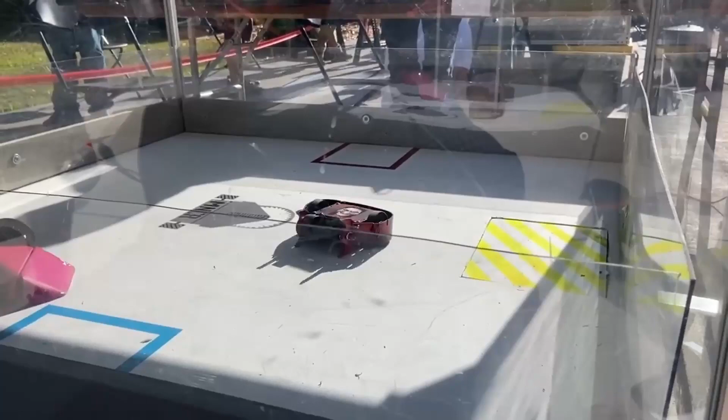I've built several combat robots at this point. 2 versions of Stompbot, 2 versions of Blastwave, and Thwackintosh. However, they are all quite small, capping out at 1 pound. So for my next robot, I decided to go big, but not too big, and push towards the featherweight class of combat robots. I'm Kepler Electronics, and meet the newest addition to the fleet, Dreamphaze.

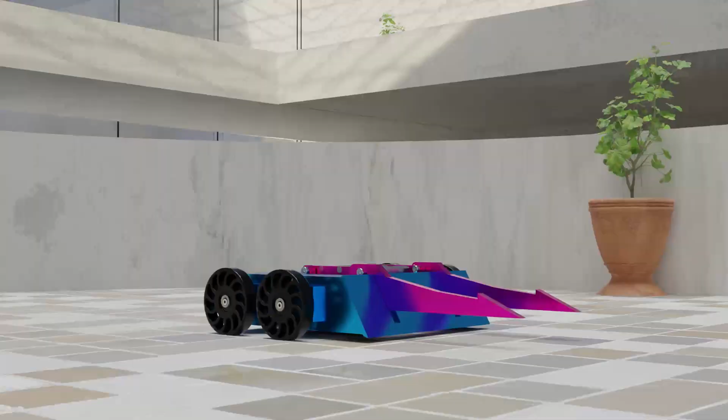Dreamphaze is designed to be a competitor for the Sportsman class, which disallows certain designs as a competitive challenge. Active weapons are required, so a purely defensive design like Stompbot would not be allowed. Kinetic spinners are also disallowed, so something like Blastwave would also be against the rules.

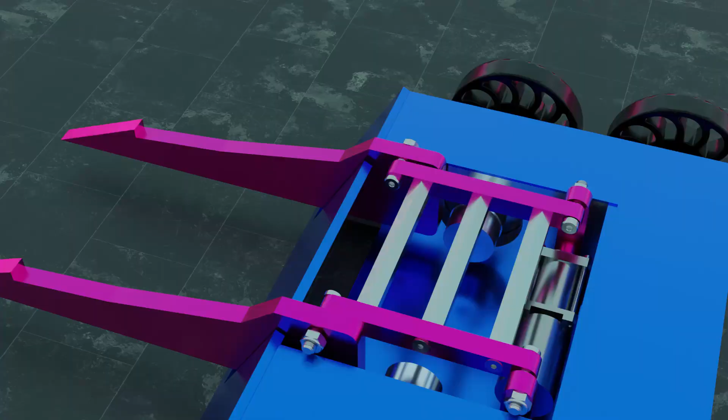The reason I decided to go with the Sportsman class was because I wanted to build the robot out of relatively inexpensive parts and not have to worry that it would get completely destroyed in its first match. So I went with a lifter design comprised mostly of affordable aluminum plates.

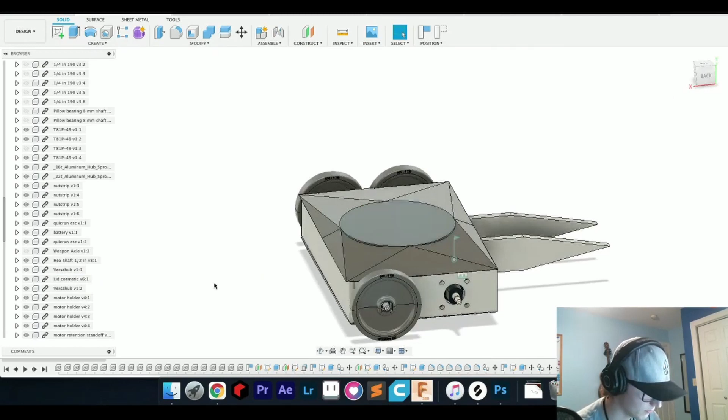I actually have 2 CAD designs for the robot, the initial ill-conceived design that I would eventually scrap, and the modern design I made mostly on stream. I designed this mostly during my economics and music theory classes my senior year of high school. It looks pretty decent at first glance, but has quite the horrible pivot mechanism for the lifter.

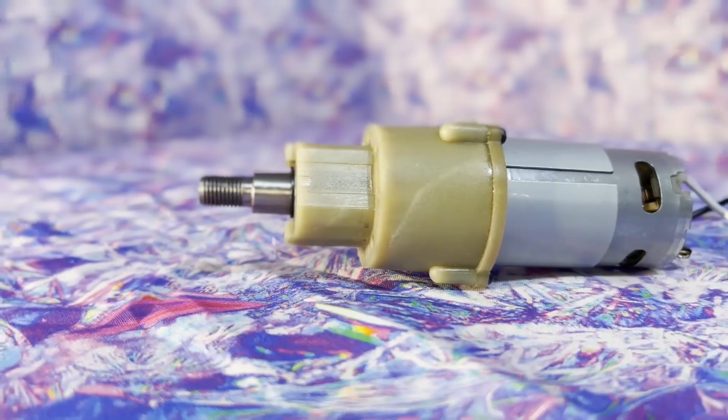Since I have streamed most of the CAD design, this video is going to be an abridged version of the process of designing Dreamphaze, just to give an idea of how I went about designing something of this scale. So let's start with the things that were pulled over from the first iteration, the motors. The drive motors in both designs are just cheapo drill motors.

I already bought a lot of these like 2 years ago, so they've been sitting in my closet for the longest time. These are considered perfectly acceptable featherweight motors, albeit disposable, and I will be using 4 of them. For the lifter motor, I designed it around a P61 gearbox with a 550 motor mounted to it.

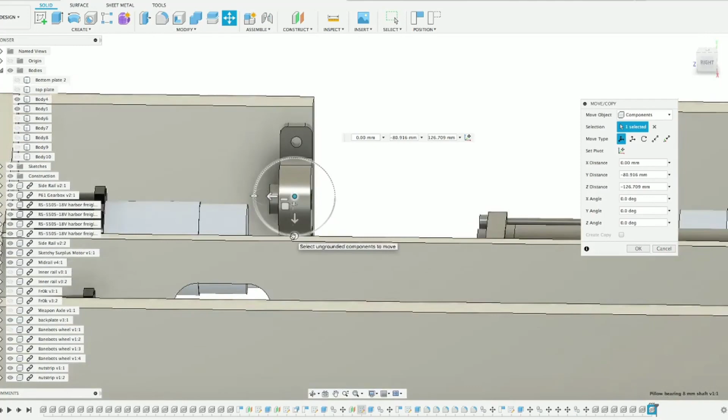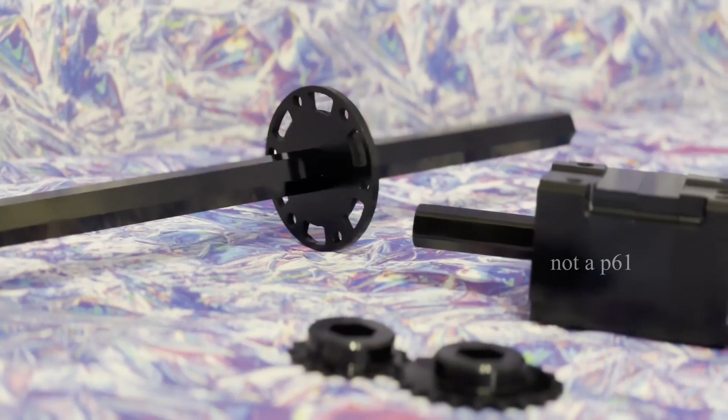So, when I decided to start streaming my CAD design sessions, the bot looked like this. A couple plates of aluminum, motors, and the forks in front. In the first stream session, I immediately went on to try and design some nut strip to allow for easier assembly, and added in some wheels from Banebots. I did move this plate from the bottom to a more central location, cutting in a hole for wire routing.

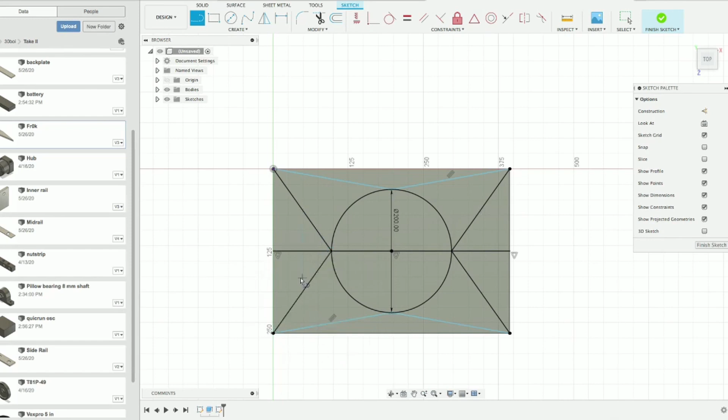I also prototyped some lids and continued onward, making some front panels before going off on an absolutely ugly cosmetic cover attempt. The fork bearing blocks were initially supposed to be held in with standoffs, a really quite horrible design that I thankfully realized immediately at the start of the second session when I replaced them with pillow bearings. The wheels were also replaced with bigger wheels to allow for some added thickness and some cosmetic top armor.

It was also at this point that I had nailed down how to actuate the arms. The Banebots P61 gearbox has a shaft replacement to allow for a 1/2-inch hex shaft, which mates perfectly with the Vex Pro Thunder Hex line of products, which would allow me to use their sprockets and chain. I didn't bother swapping out the shaft for the model, so it is a bit ugly, but I guess I have to deal with it at this point.

I also put in some rough approximations of some speed controllers and a battery, but I'm still not quite sure what I'm going to do with all the electronics, so I'm not going to get into that in this video. I did start prototyping a lid design during this session, though.

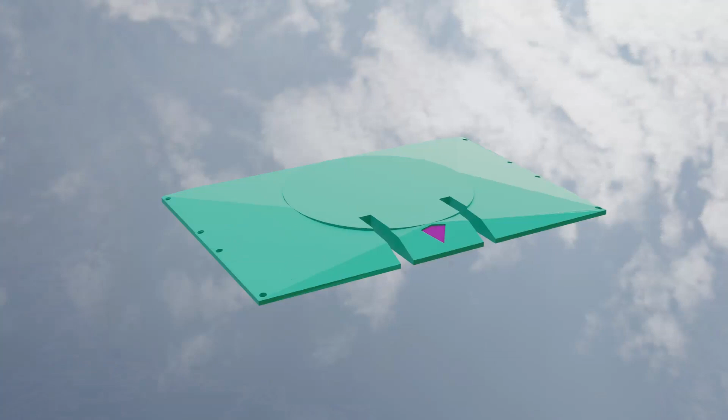Let's take a detour and go over theming. Similarly to how Blastwave was intended to be synthwave themed, Dreamphaze is intended to be vaporwave themed. To massively oversimplify, if the synthwave aesthetic is a dark version of the 80s, inspired by science fiction and action movies from that time period, vaporwave is a much more chill interpretation of the 80s and 90s styles, incorporating a lot of corporate imagery, Japanese culture, Greco-Roman statues, consumerism, and the early internet.

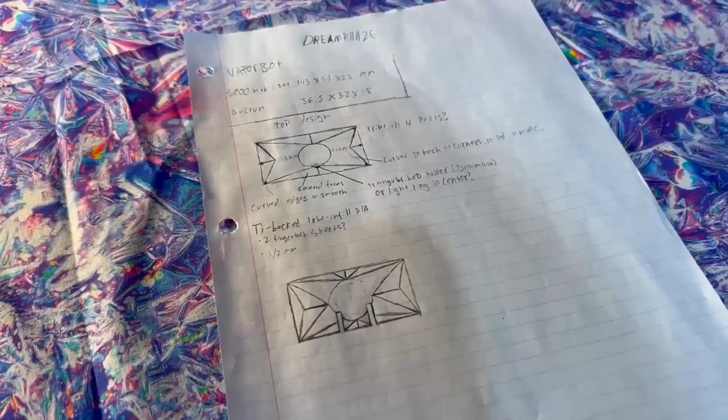While both of them do push into cyberpunk territory at times with their imagery, vaporwave is generally a lot more relaxed about it. While designing the bot, the model's aesthetic ended up a lot closer to a general 90s theme, which explains the lid design.

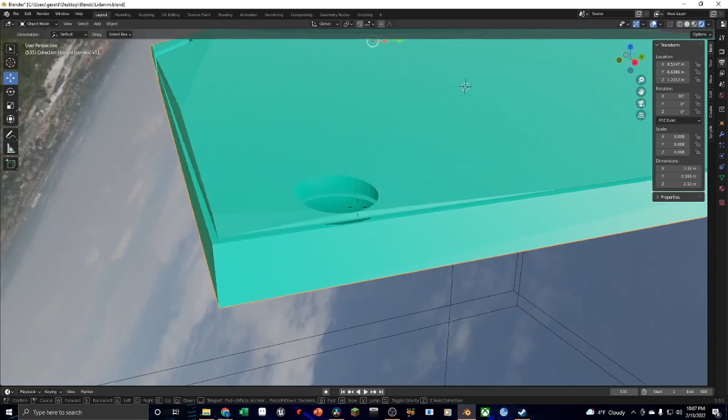I've always loved the Sega Dreamcast design. I grew up with it as a child, and its massive circular disc tray with these sloped sides has really just stuck in my imagination. I also really like the original Xbox with that massive X shape on top. The top came out as sort of an amalgamation of the ideas of both, taking the clean shapes of the Dreamcast and the polygonal design of the Xbox.

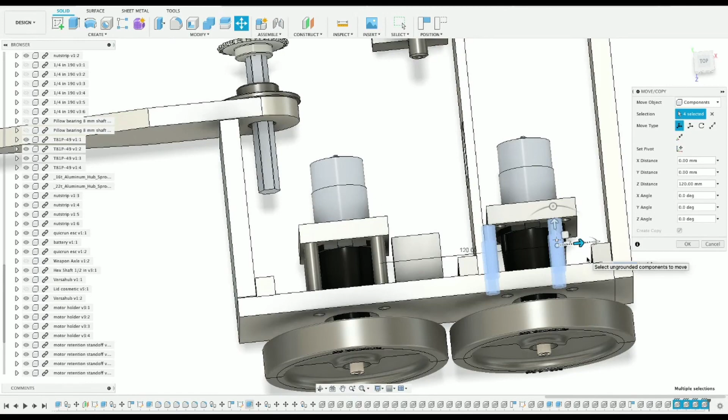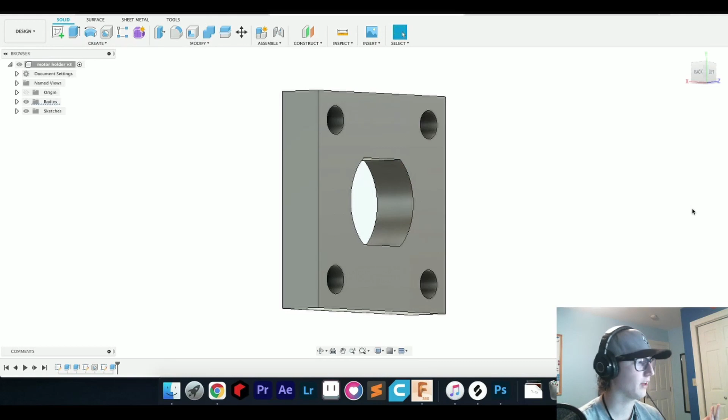After finishing up the lid off camera, it was time for session 3. Real Thunder Hex shafts were added rather than a circular approximation. I also adjusted the placement of the middle plate and started making some motor retention brackets. I did also add these mounting holes to the side rails before redesigning the forks to better fit the new mounting plates. I also designed some standoffs to hold the motor brackets at the sidewalls because I hadn't done that yet.

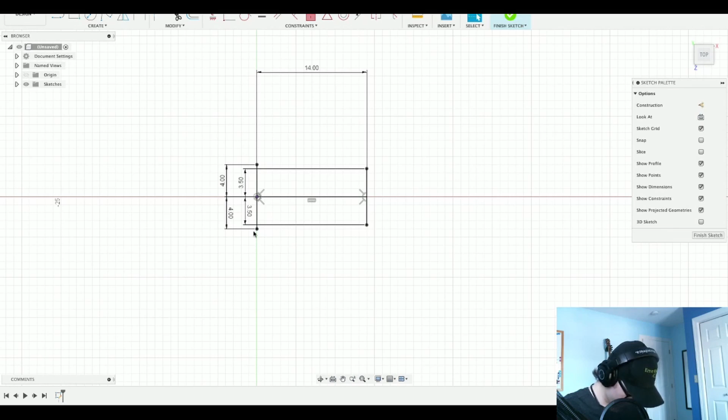That was all for session 3, so in session 4, I realized between streams that the bearing flats were much too small. So I decided to replace them with half-inch ones. I cut some holes in the lid to allow the forks to slide through for increased range and played around with some design variants before settling on this simple channel style. That did take up most of the stream, and at this point I got pulled into university classes and didn't have any more time to stream until December of 2020, which is when I came back with a face cam,

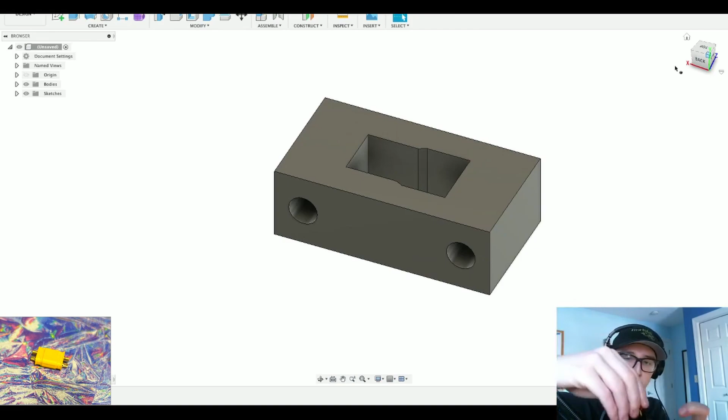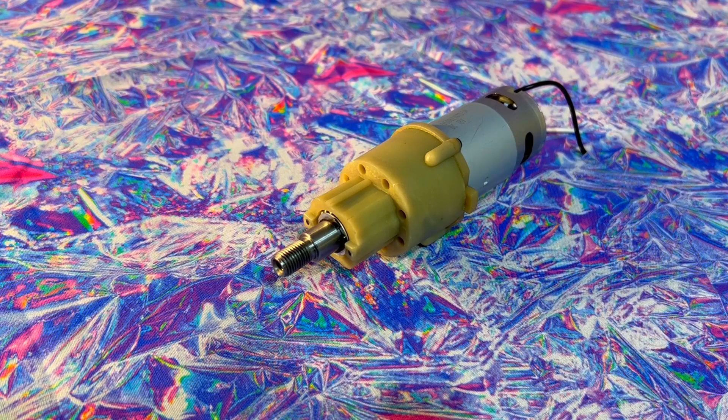so that's pretty nifty. Session 5 started by making a new motor bracket to supplement the original. This would use the same mounting holes as the initial design, gripping the double D shape of the motor's front and preventing it from twisting. I also added in some lid mounting holes and wheel hubs, the plan for which was to thread onto the drill motor shafts. I mistakenly thought that the bot was done at this point, but it was not, so a session 6 was needed. The reason was that I had forgotten to add in a power switch.

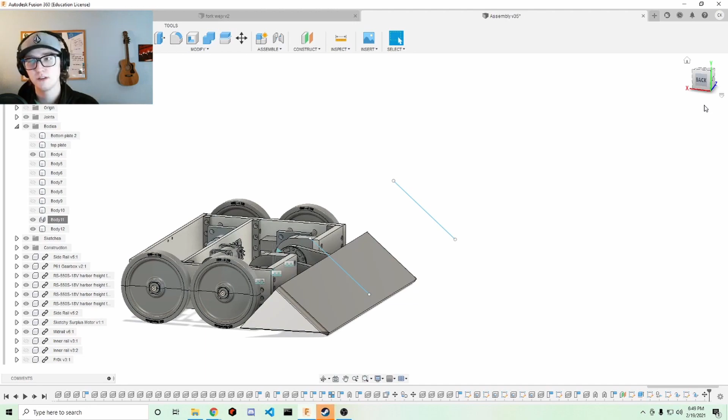As always, power switches are required to comply with the rules, and as there really isn't anything between the small and affordable Fingertech switches and the massive and costly Whyachi switches, I decided to roll with a removable link, where a power connector is used to bridge the connection. I had a bunch of Deans connectors lying around, so I designed for that, but coming back to this a while later, my stock of Deans seems to have disappeared. So I'll be switching over to XT60s, another more yellow connector type, which also seems to be preferred for this purpose more so than Deans.

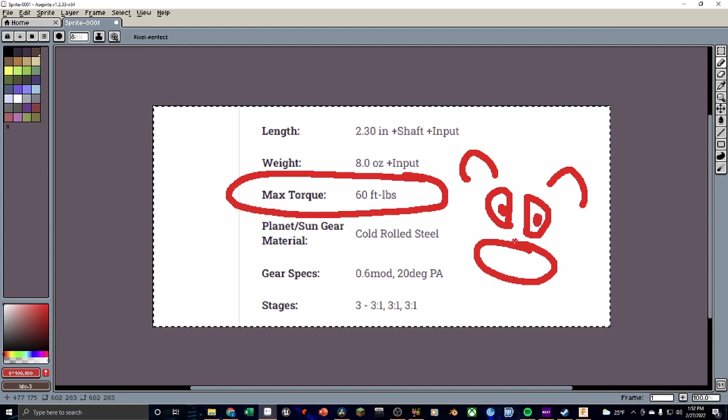I then decided to redo the nut strip to use the Fingertech stuff. If Blastwave's drum taught me anything, it was that drilling and tapping is incredibly difficult with the tools I have access to. So I decided to switch over to some pre-made stuff rather than my custom designed stuff. Holes were also made for the weapon motor, and with that, the stream was done. I did run across a couple issues with the motor mounts, as the motors I had ordered included an extra peg here, but that was easy to account for.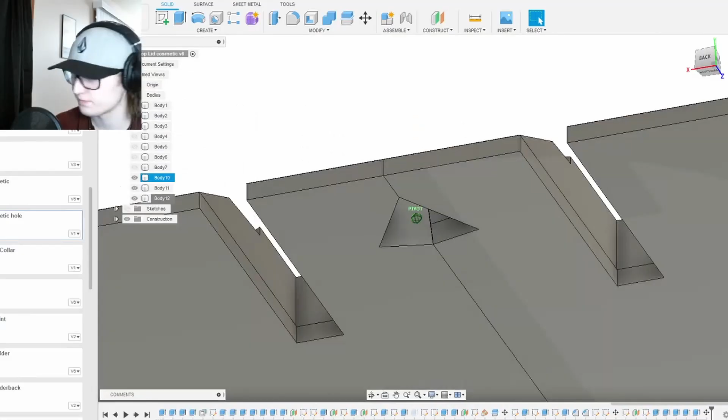But it was at this point where I felt pretty confident about where the bot was sitting, and I got ready to order all the parts. However, I was spooked by this tag here on the BaneBots page, saying that the gearbox had a limit of 60 foot-pounds. Now, the values that I had been getting, assuming 8-inch forks and a heavier than normal opponent, were above 300 foot-pounds.

And at this point, my classes started to pick up again, and I had to put this project back on the back burner. Then, about 3 months later, with my classes finished up, I decided to go and figure out how much of a gear reduction I needed to safely lift an opponent. That's when I realized I forgot to convert my units. You can imagine how dumb I felt, as lifting a 45-pound opponent with our 8-inch forks only required 30 foot-pounds of torque, which was exactly half of the maximum load. So I never needed to change anything at all, and I was done, right?

Wrong. I still needed to add in an LED light to make the whole thing legal, and rather than simply slapping an LED here and calling it a day, I decided to take another page out of the Dreamcast book and cut a triangular shape from the lid, which would then be filled with a small triangular piece. This would either be cut out of frosted acrylic or printed with a translucent filament to get some cool lighting effects. Aesthetics aren't the most important thing, but they are pretty important to me.

However good or bad things turn out, I want to know that I at least tried to build something that looks good. Nothing about the design really screams Vaporwave. That's alright, I guess, but I still did have 2 things to play with off stream. The first was color, and I wanted to try 3 things. The first design was one of the ones that I had made on stream, where we had a minty green body with pink forks and purple wheels. It's a bit nuts, but it does kind of fit the vibe.

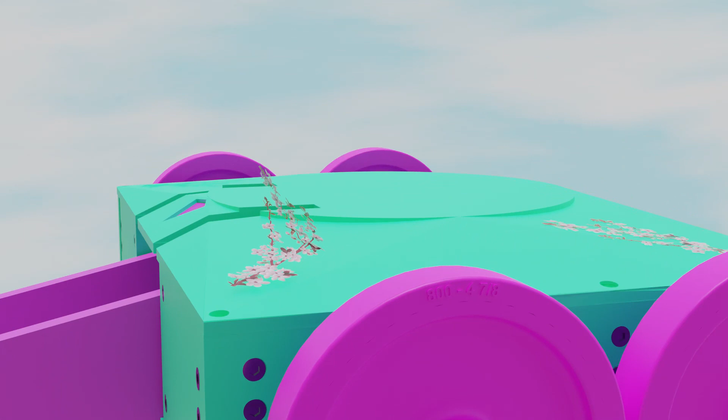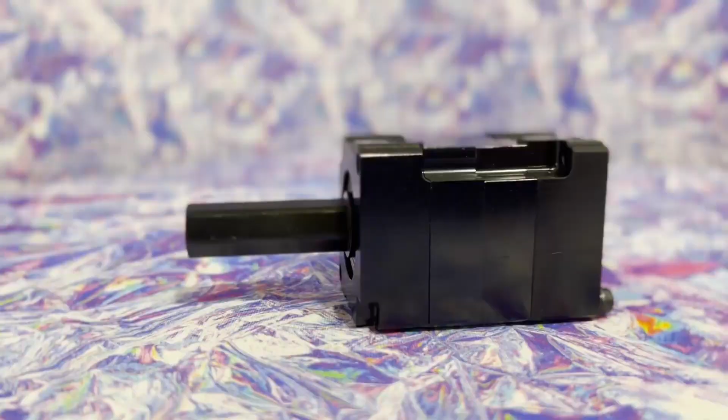The next color scheme was this pink color scheme, or as I have dubbed it, the strawberry milkshake version. I wanted to try something with multiple shades of pink, as that reminded me of the Floral Shoppe album cover, but honestly, it's a bit much. I also tried a teal and pink color scheme, which is pretty self-explanatory, but honestly, I didn't really dig those colors for the Vaporwave theming. But for one more color scheme, I decided to take the minty design, remove the purple, and fine-tune the pink color a bit. I think this is the final color scheme, at least for this iteration of the bot.

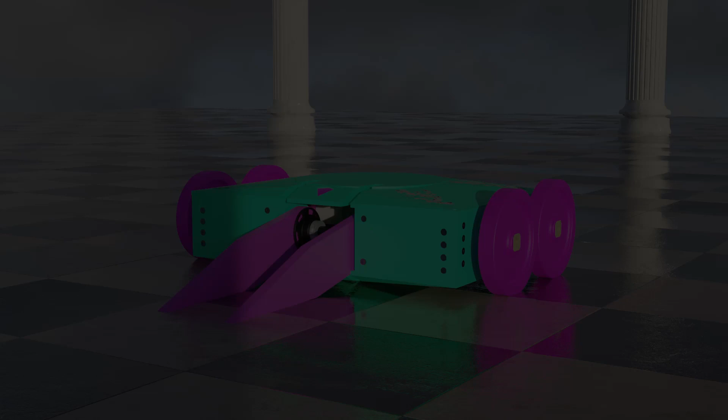It's pretty Vaporwavy, and will be even more so when I jazz it up with the second thing I was talking about earlier, some nice aesthetic stickers and decals. Specifically, I want to put some cherry blossom decals on the lids. The color already matches an Arizona green tea can, and seeing as that can has somehow become one of the tenets of the Vaporwave aesthetic, I'll be using that to increase the bot's Vaporwave score even more. So since I can't draw myself, stickers. I haven't really decided on what stickers exactly, but since everything here right now is in the realm of 3D, I decided to simply add some random PNG images as decals to the top of the lid. And yeah, I think that really adds something.

And with that, I think we've covered the full design of Dreamphaze. This is one of the longest running projects I've done on the channel, as I started this in my senior year of high school and I'm now in my sophomore year of college. It's been a long time coming. I've actually started to purchase a few of the parts already, as you can see just chilling in this clothes hamper here. The only thing that I'm really missing at this point is the wheels, and I also did decide to go with a different gearbox as opposed to the P60, but that happened after I wrote this video, so yeah, just stay tuned for the second part where I actually build the darn thing, and you'll get to see what gearbox I actually picked.